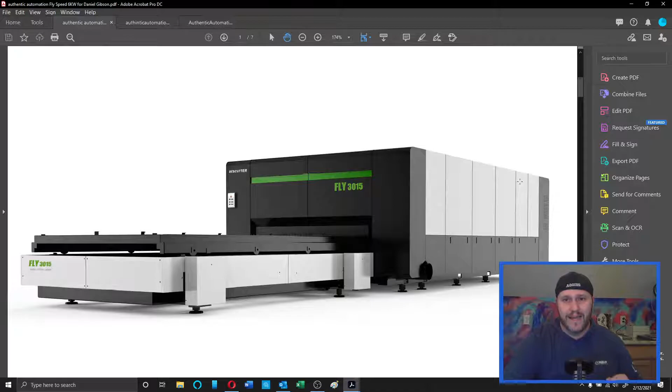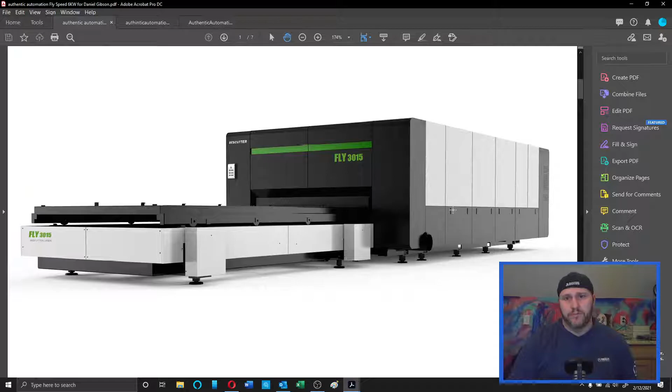This is the first one that I know for a fact I have a good market ready to go - people need this service. It's a fiber optics laser cutting machine. This is going to take plate and cut really, really precise cuts in steel as thick as 1 inch. So really excited about the idea of getting this in.

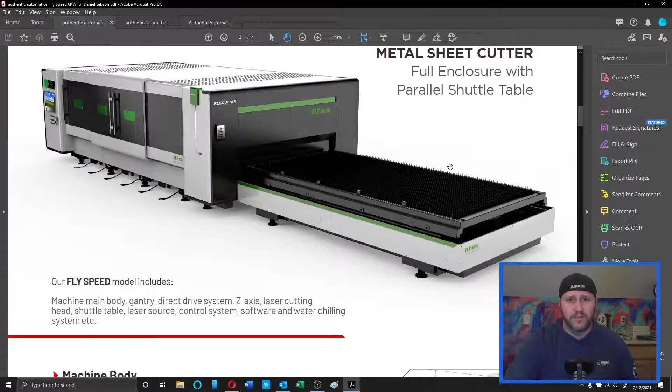It's a good looking machine, and it's actually a good price for what I was looking at. The laser is so big it can't go on the cutting head - this is the cutting head right here. That's why they call it fiber optics: there's a fiber optic cable that runs from the laser, which is off the machine, all the way into the cutting head, which cuts the part.

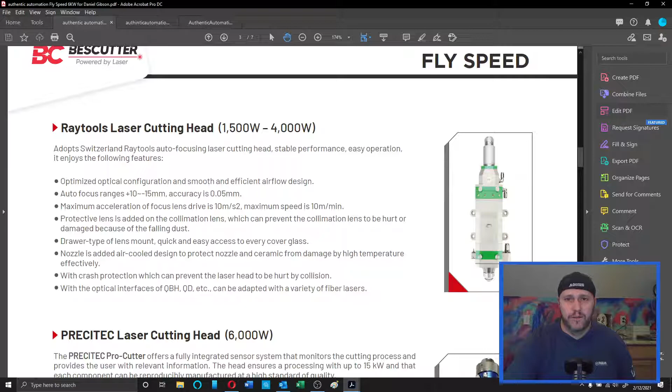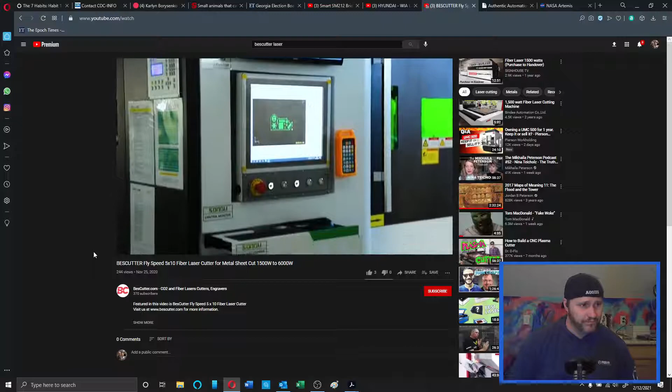So I've got a little video of it as well I pulled up. This thing just looks absolutely amazing, what it can do. This is exactly the machine that I'm looking at. I actually have a video specifically of one of the machines I'm going to buy - this isn't the exact machine, but it's this type.

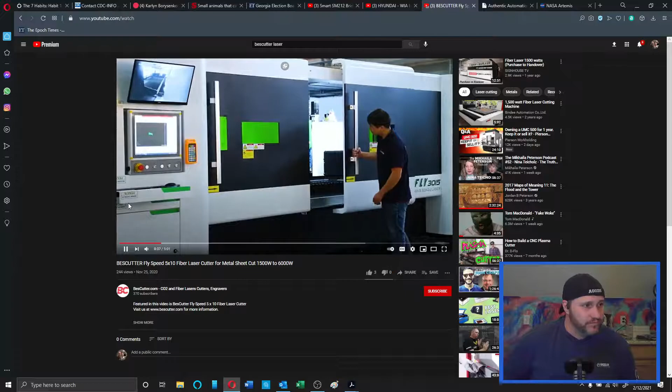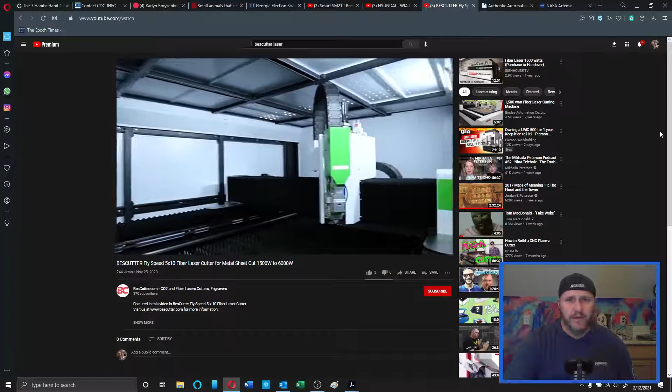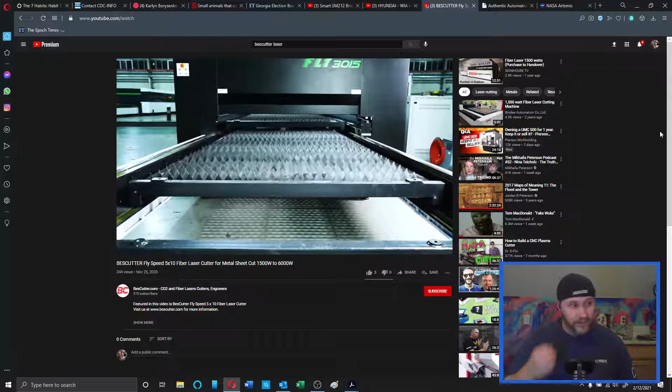You can just see it's a nice, really nice workspace. It's going to be big enough to handle most of the plates and most of the parts I'm going to be doing. And I love this pallet changer here - this is really nice. I have an idea of actually doing some automation for putting material on and taking material off. I'm really, really excited about what I could do with this kind of machine.

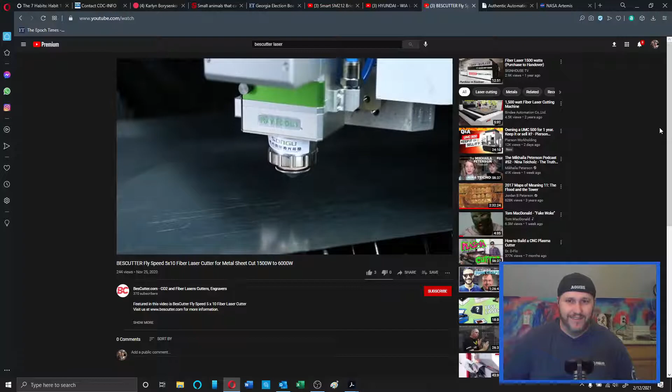But just, watch what this thing can do - it's pretty amazing. Now, I think that's a little bit sped up there, but just some good looking parts, really good looking parts.

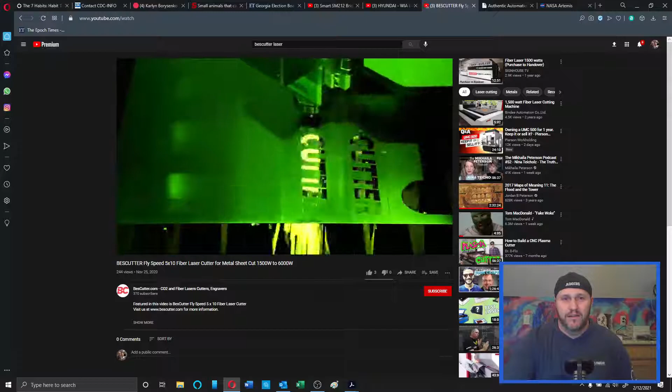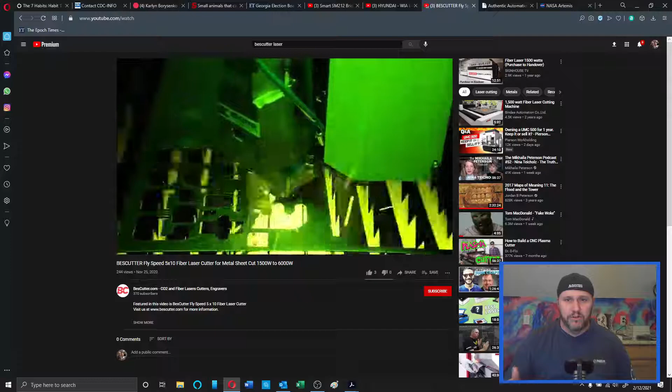Couple that with the type of machining I'm going to be doing, because one of the things I always run into, especially at fab shops, is that if I can go ahead and laser cut all the parts that come through my shop, that's my intention to do, at least minimally.

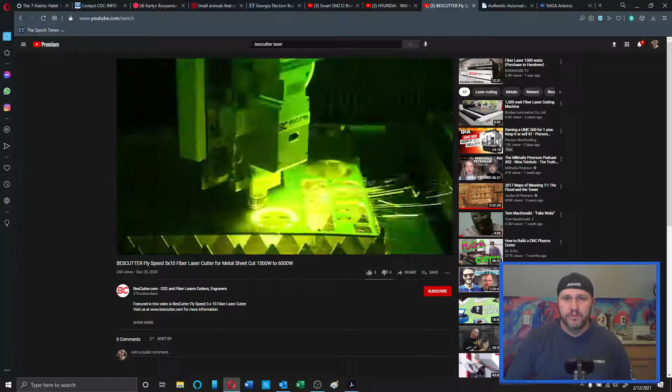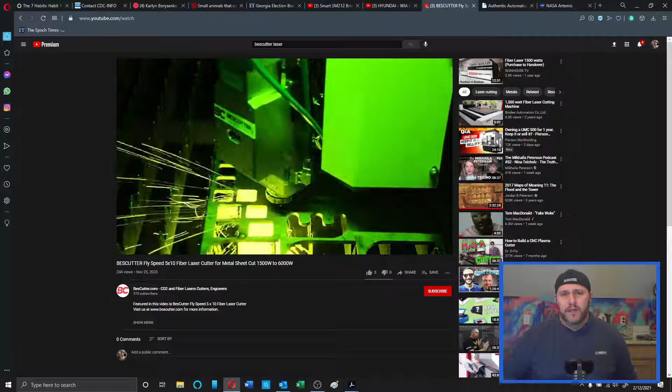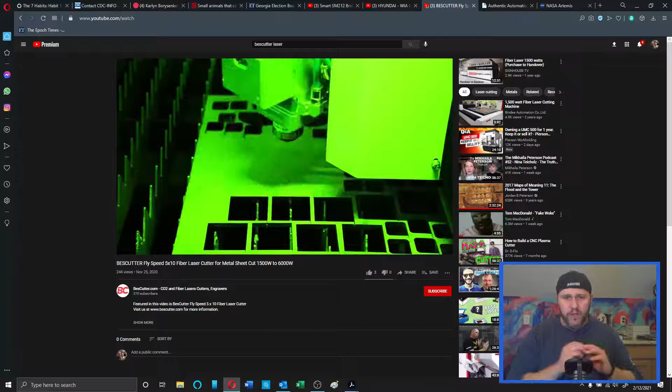One of the things that is a constant problem a lot of fab shops don't see with their machine shops is that work holding on a torch cut part or a plasma cut part is really difficult, because the cuts are never straight, never square. That impreciseness always seems to cause fit-up problems when you're doing a weld out. So that's one of the reasons why I want to go with this - I want to make that next step to minimize labor.

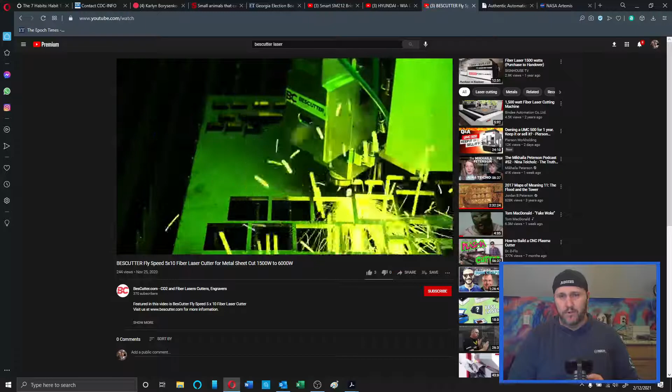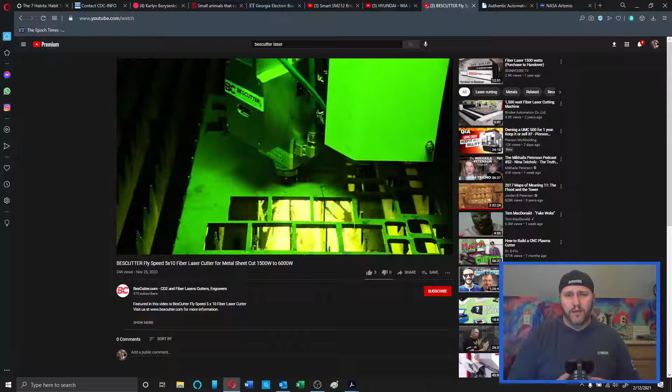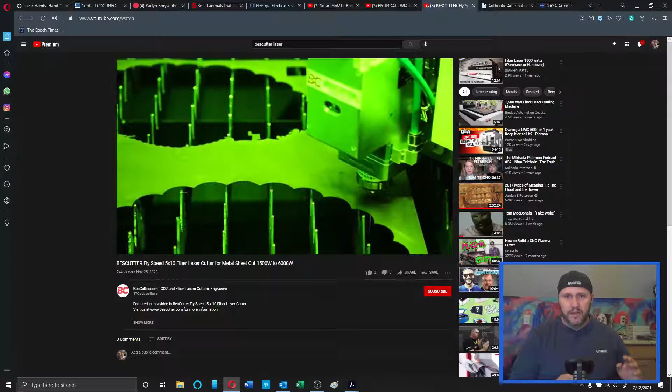Because I understand - I mean, yes, there are some great welder fitters out there that can do amazing stuff with imperfect parts. But the better, more precise and perfect your parts are, the easier that job is for that fitter. So minimizing the fit up and weld out processes by saying, nope, we're not going to torch cut even though we can, we're going to laser cut everything because we know the precision isn't necessary, but we have the ability to do it. So we're just going to do that. That way it minimizes labor, because labor is going nowhere but up.

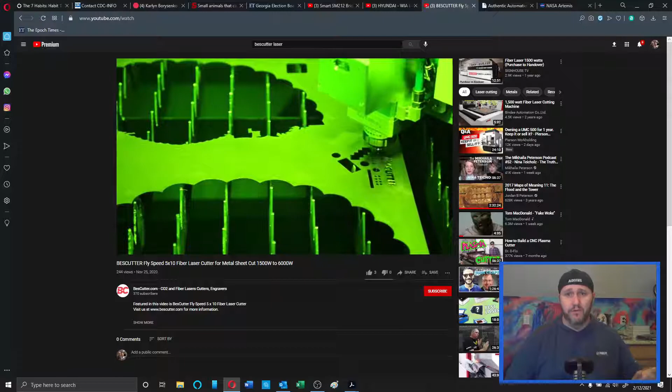And I know that the value of these machines is probably going to go up with inflation, to offset the value and cost of the interest rate of having a loan for this equipment. So I'm really excited about getting it.

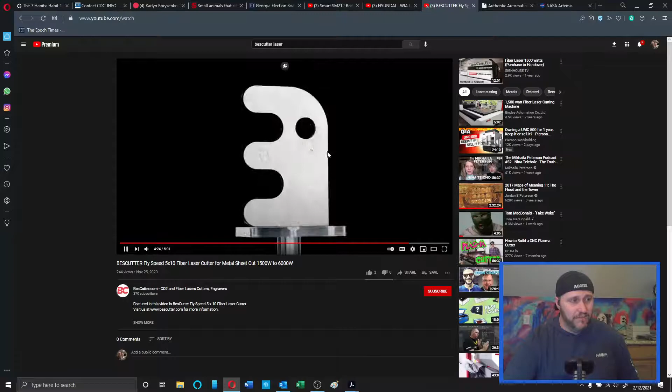I'm really excited about this piece here. It just looks fantastic - some really good looking parts. They do some really thick stuff. I mean this part right here is, yeah, up to an inch thick. Anything over that I'll have to outsource, but this is going to cover most of the range of parts I'll be making. So just really excited about that.

But one of the problems is they don't have any of these machines in stock. They're selling them out, so right now they're promising me a 12-week lead time to get it. I think it's going to be more like 16 to 18 to 20 - there's just no telling right now. The market is so volatile. Getting machines out of China, which is where this machine's assembled, under COVID conditions is going to be difficult. So I have no doubt that initially getting going with this is going to take a while - that's the only downside.

But that's also one of the reasons why I want to move so quickly on this machine - I need to get it going now. I don't know what kind of down payment they're going to need yet, I haven't discussed that with this group. But with these other machines I'm looking at, they're in stock, I've already signed sales orders, I'm ready. They're just waiting on my down payment to send the machines to me. I told them I'm trying to secure financing right now, and they're holding it for me - they're good partners in business with me so far.

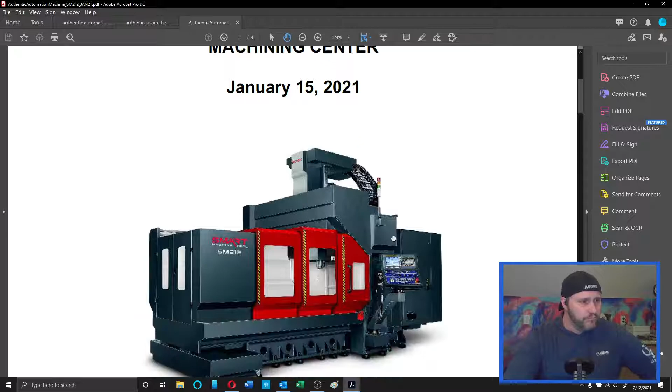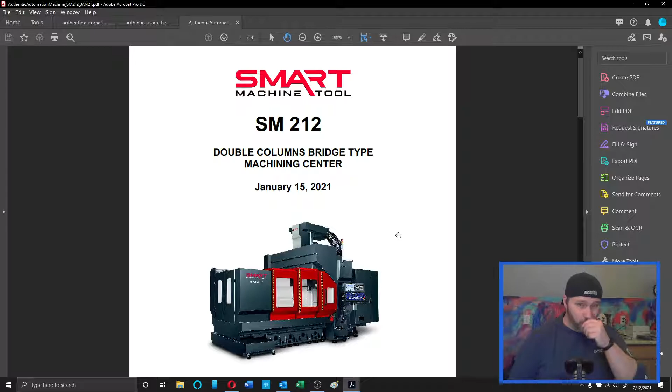So one of them is a really, really nice looking bridge mill. One of the things I did that's unique to my industry is I sat down and said, okay, I want to get the most value for workspace. Just like how a realtor or commercial real estate investor would look at a piece of property and go, how much is it per square foot - and the lower the price per square foot, the better efficiency you got for the building - I took that same mentality toward buying a machine. I wanted to make sure I bought a machine that was the most cost effective for the work envelope it would get.

I'll explain a little bit why this machine makes the most sense to me in getting started, because it's going to allow me to capture the most amount of the market for the least amount of value per inch that I can get with any other machine.

So a lot of traditional machine shops start with a C-style mill, where you have a table that moves in Y and X - so a 3-axis machine. We have a tool holder that moves in the Z axis up and down to change your height, and a table that moves in X and Y.

Well, this one doesn't do that necessarily - the table moves in X, but it's stationary in Y, and the head actually moves in both Z and Y. I like that, because for one thing you don't have to worry about your material weight affecting your Y travel, since your Y and Z travel is always going to be consistent, minus a few ounces depending on the weight of the tool in the spindle.

So sometimes when you get to some of these bigger parts on your machine, you can actually start seeing some sluggishness, and it can really affect your interpolation. The diameter hole you cut, you want something as perfectly round as you possibly can with these machines. When you put weight on something, it slows things down, causes friction, causes sluggishness, and can actually affect the quality of the part you get out.

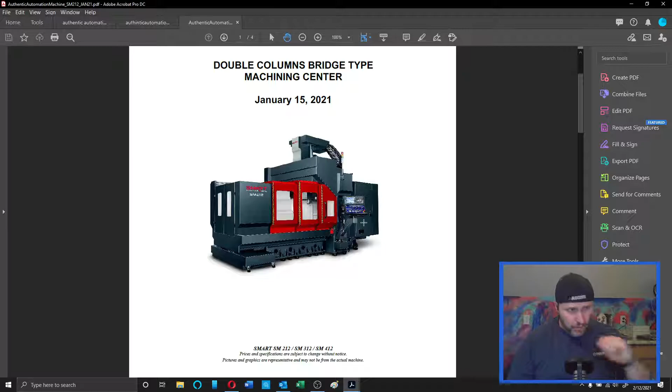Secondly, because it's a dual column bridge, we get a significant amount more Y-axis travel. A typical C-style mill like this, you might be lucky to have 28 inches of Y travel. This one is 47.24 inches. It's a huge amount of Y travel.

So again, getting back to the real estate investment idea, I took the square cubic inches of what I can get per inch for the value of this machine. Because of that Y-axis, it basically doubles the value of this machine compared to a C-style mill. Now, a C-style mill is a little bit cheaper, so it's not as big a value difference, but...

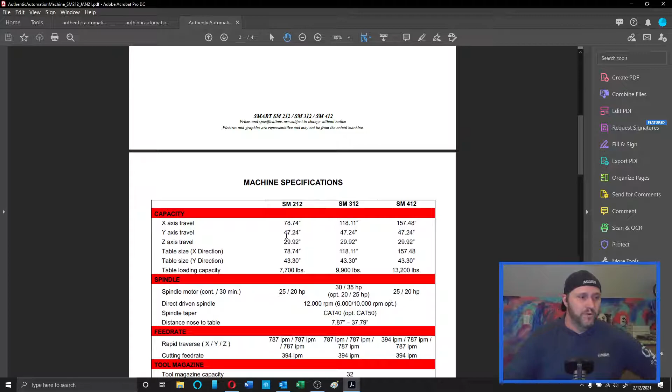The pure fact that this machine can handle that kind of travel, that kind of market, allows me to bring in bigger parts, which gets me into a bigger market share right out of the gate, because I have the capability of doing bigger parts than most traditional C-style mills. So I'm really excited about that, and one of the reasons why I'm really looking hard at this machine.

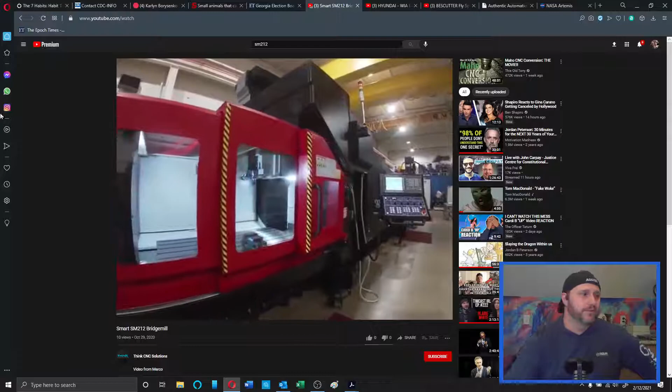This one's great because I actually have a video of the machine. This is specifically the machine that I'm going to buy. This is the one in stock in Milwaukee. This was published October 29th. This is the one they've been trying to get rid of, and they finally got me to sign the sales order.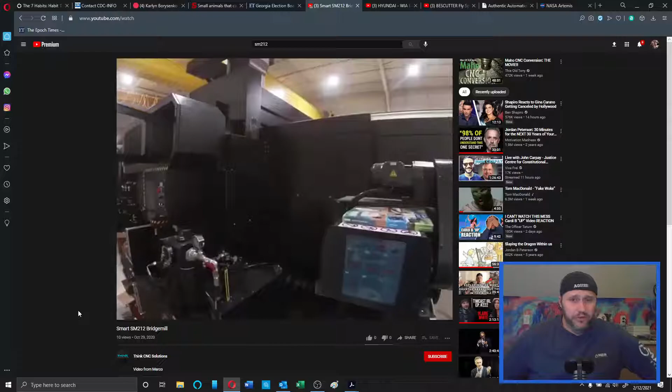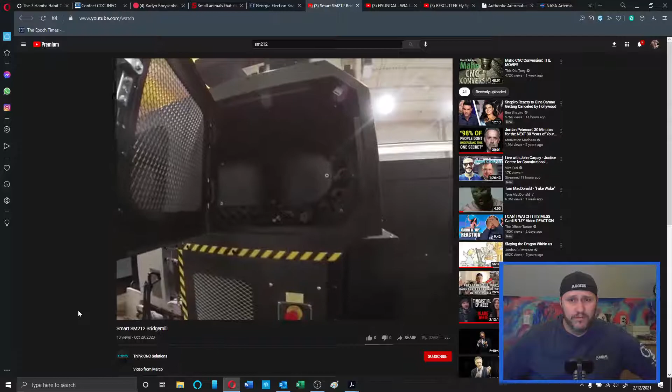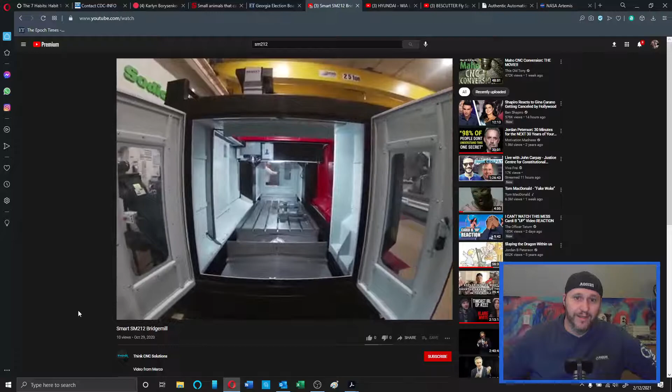They're calling me, wanting money right now, because they know this machine is about ready to be sold. I think they've already had several other interested parties, and I'm pretty sure they know, like I do, that in 3 or 4 more months this machine's value is going to go up probably $40,000 to $50,000 more than right now. The market value for this machine is just going to go up. They're ready to get their money, sell it, and get another one in. They need the storage space, because these are going to be hot machines.

So even if I buy this machine and the business doesn't do well, there's still going to be value in the machines that I buy. And one of the reasons I want to buy new for sure with all these is...

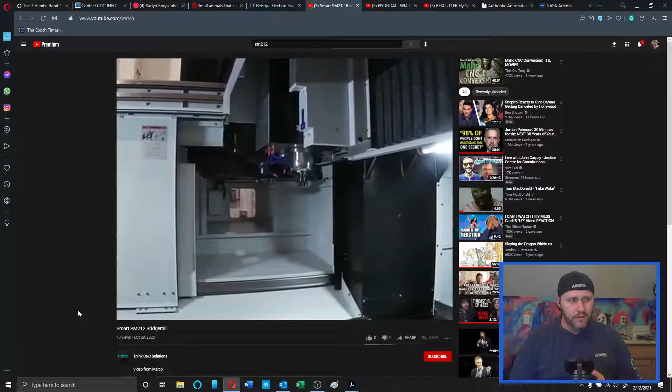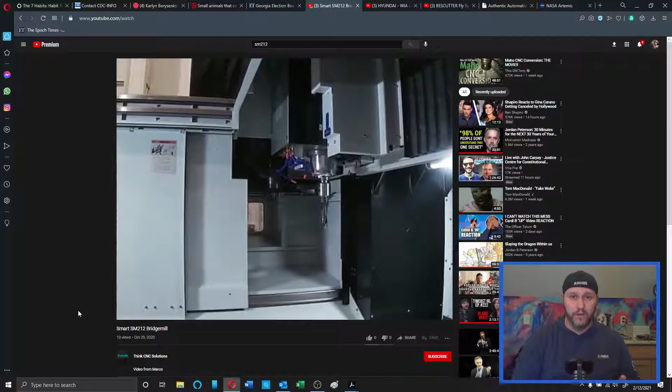My cash flow is going to be extremely important for this business, because I am relying so heavily on debt to get this business going. Unfortunately, you just can't avoid that in this industry unless you buy some really, really cheap used equipment, and a lot of times with used equipment you just don't know what you're going to get. I don't want any interruptions in my cash flow from equipment failures. I've got to keep that cash flow going, especially to keep up with these debts. So that's going to be really, really critical for what I'm doing, and that's why I'm looking at new.

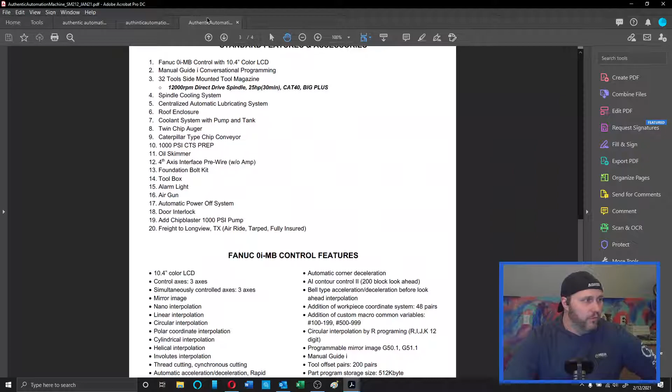Those are 2 of the 3. I've got one more here that I'm looking at, and that is this lathe here.

So this basically covers almost every bit of the machining, everything other than I might hire a couple of welders for the shop later on, so that we have welding capability. Welding machines aren't expensive, so I'm not too worried about getting those going. But to have this equipment puts us into the realm of possibilities of what we could do with minimal equipment, minimal personnel.

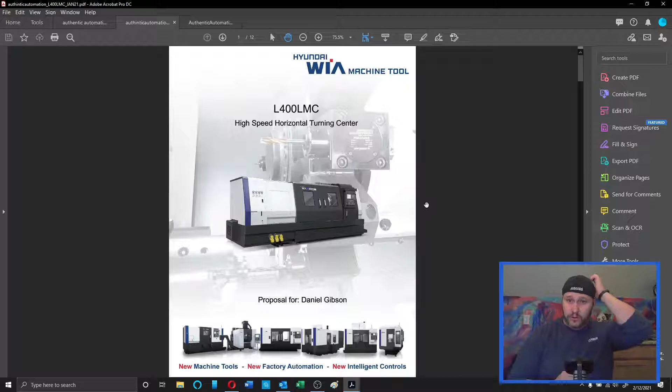It's actually mind-boggling and I'm so excited. I can't tell you what we can probably get done with minimal amount of manpower with just this equipment. Having good equipment makes a huge difference in a manufacturing facility. So I'm excited. This machine was well valued.

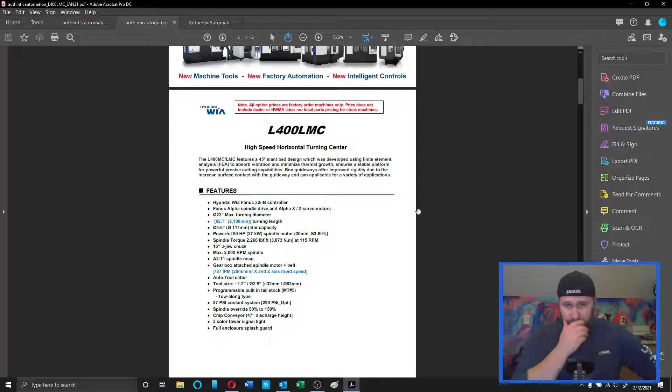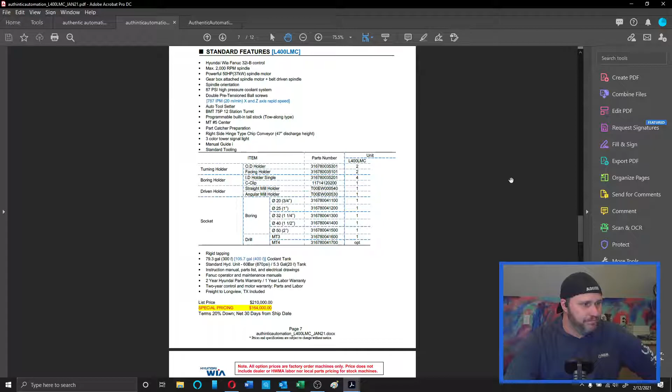It's priced to sell. It's a holdover just from the end of last year. We've got a sales order to try and avoid some tax, I think. It's way valued under list price. That's why I've already signed the sales order. I'm like, look, I got to get this because no matter what, if I buy this tomorrow and I can't make it work with the business, then selling this machine I'll get pretty much all my money back. So there's really minimal risk in this.

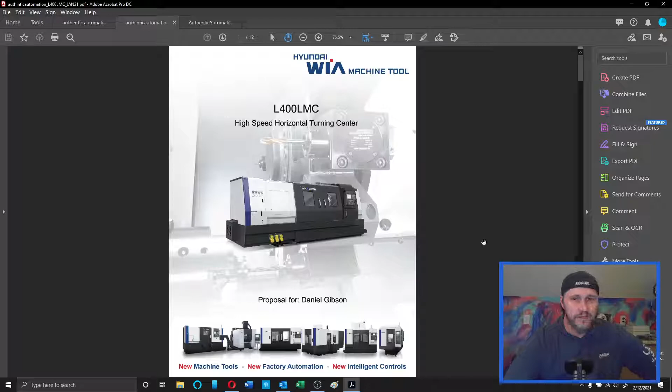So I'm excited about that. This machine, if I can make it work and I get the parts, these machines will make money and they'll make it quick. So I'm excited, it's a good machine, good live tooling apparatus.

I've run this exact machine except a little bit shorter on the bed length, so it can't handle quite as long of parts as this machine I'm looking to buy. That's another thing that's really impressive about it. I'll get that extra length, so I'll be able to take in more RFQs, I won't have to no-quote. That's the last thing I want, especially with the startup. I want to make sure that if they send me something, I have the ability to quote it and at least ask for an opportunity to do their work.

With these 3 machines, I think that's really going to put us right up there at the top, right out of the gate, with minimal equipment necessary. I want to try and keep things a little bit small, especially starting out. I want to make these machines run as efficiently as I possibly can, maximize their efficiency.

As we move forward, I'm going to try to incorporate more and more robotics. I have some ideas for how to roboticize a little bit of the plate machine, and then getting robots to run this equipment. Hopefully I can get the right kind of product. You can't really do that at a job shop, which is what we're going to start as. We'll be a job shop where I'll actually be running most of the machines here.

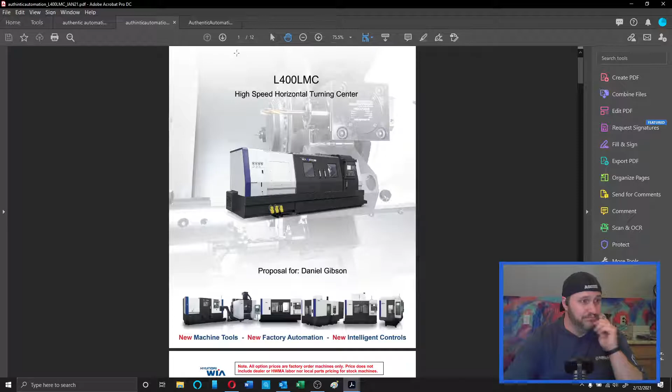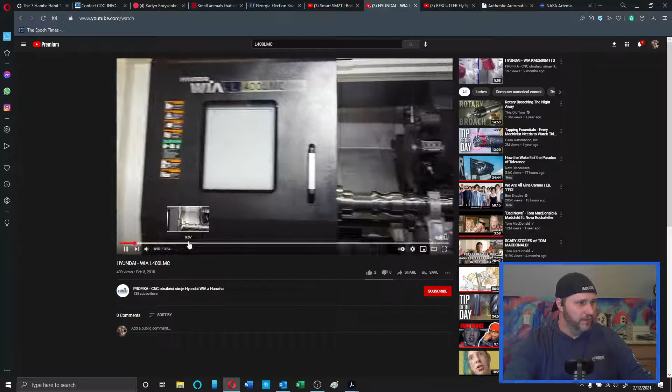That won't be a problem. I can keep up with 3 machines easy. I had a little video pulled up of this type of machine here. It's a pretty good view of what you can do with it. It does some really beautiful parts. Like I said, I've run this machine before. They're a great machine. Very excited about the opportunity of getting this one.

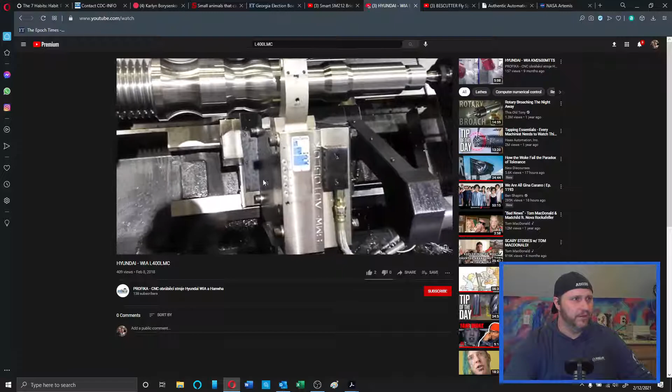All right, now just a little bit to tell you about what I want for our shop. I've had this idea for a couple of years now about utilizing the moon. All right, I'm jumping really quick, hell of a segue - moon, machine shop moon. But Trump, when he introduced this idea, and it's probably not just Trump...

But it was one of the reasons I did like what Trump was doing, is that he was actually encouraging the idea that we need to do more space exploration, we need to get NASA going more with something new. So when I heard this Artemis program was going into effect, I thought that was fantastic, because I've been thinking for a long time. I was actually watching the movie The Martian with Matt Damon - good movie, really enjoyed that. I love a movie about problem solving in a new environment, that really speaks to me. I'm watching that and just thinking, man, it's really cool that he was able to launch off Mars with minimal necessary aerodynamic needs, because the atmosphere is so thin there.

To me, the moon offers a really good opportunity for humanity to overcome some of the obstacles we have with launching large spacecraft into outer space from the Earth. So I have this idea where we're calling the moon basically the harbor to the stars. What I thought was really cool is that it would be great if we could set up the ability to manufacture in space based off the moon. You basically make the moon like a harbor for space.